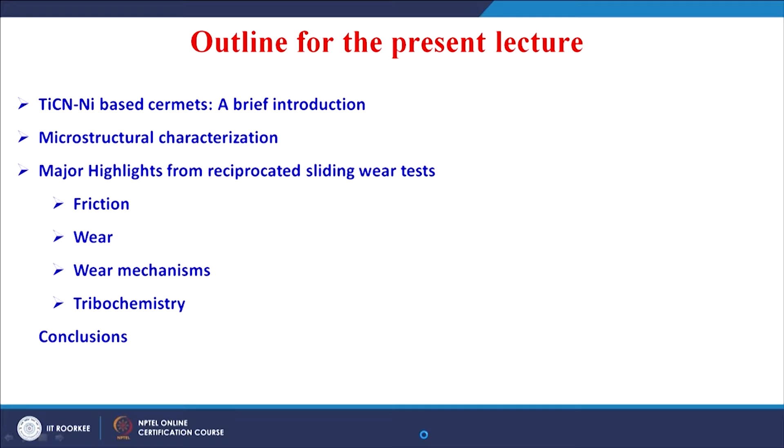Welcome all again. Today we will learn about the salient results of studies done on the tribochemistry of particular cermet materials. The outline of the present lecture: I will introduce titanium carbonitride based cermets and give a brief introduction on their microstructural characterization, then I will focus majority of this lecture on explaining the friction results, wear results, the dominant wear mechanisms, and the tribochemistry involved in the wear.

Let us start understanding what is this cermet. Cermet is a ceramic with a metallic binder, so it is called a cermet. Several examples of cermets are used in engineering applications, like tungsten carbide cobalt cermet, aluminum oxide nickel cermet, zirconium oxide nickel, titanium carbide with nickel or cobalt, or titanium carbonitride with nickel. These are several examples of cermet materials used in engineering applications.

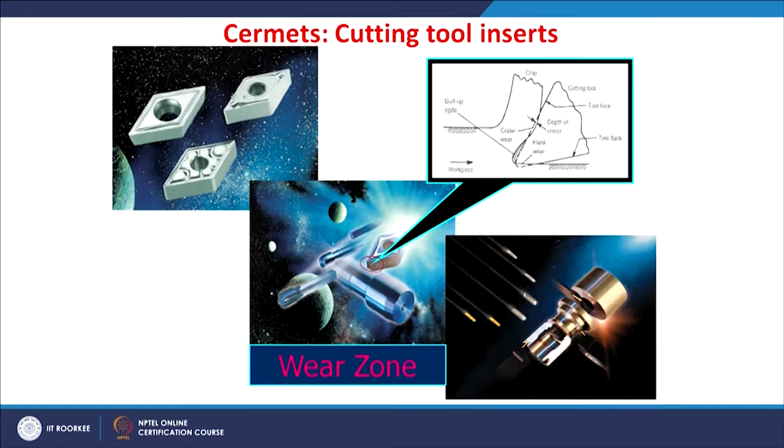Regarding engineering applications, these cermets are mainly used in cutting tool applications as an insert for the cutting tool. In machining, if you look at the tip of the nose of this tool and the workpiece, there is a large amount of friction generated. This friction induces wear, but also induces high temperature. So friction-induced heat and damage occur simultaneously and lead to material degradation. Particularly in cutting applications, the mechanisms should be studied in the crater wear or the flank wear of these cutting tool inserts.

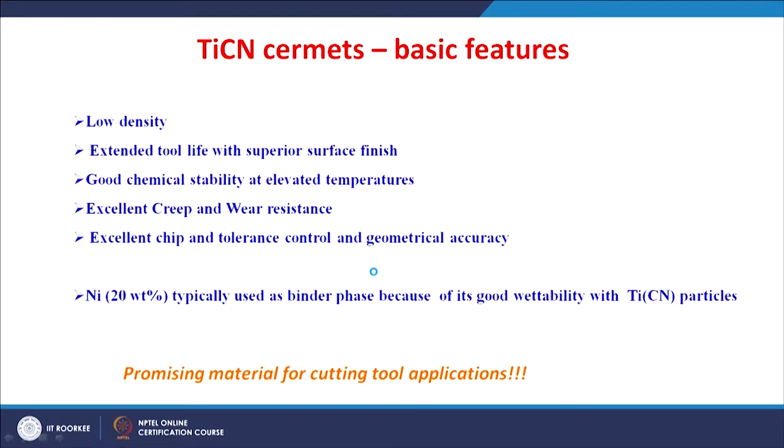Titanium carbonitride based cermets are important because they have lesser density, extended tool life with superior surface finish, good chemical stability at elevated temperature, excellent creep and wear resistance, and excellent chip and tolerance control leading to geometrical accuracy. The market of cutting tools for machining harder materials is generally dominated by tungsten carbide cobalt. Compared to tungsten carbide cobalt cermet, these titanium carbonitride cermets are attractive because of the properties mentioned here.

In these cermet materials, the ceramic of titanium carbonitride is attached with a metal, generally nickel, cobalt, or molybdenum. Nickel is generally used as a binder phase because of its good wettability with the TiCN particles. So the ceramic of TiCN attached with the nickel binder as a cermet - titanium carbonitride with nickel - is a promising material for cutting tool applications.

Apart from this binder phase which gives us toughness, there are certain carbides or nitrides also added to improve performance for cutting tool applications. For example, tantalum carbide, niobium carbide, or hafnium carbide are generally used to improve hot hardness or thermal shock resistance. When these cermets are combined with these carbides, they improve the intermittent cutting performance.

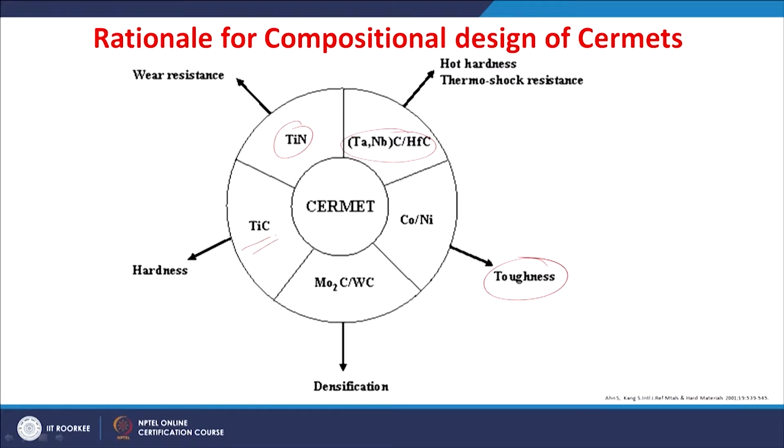Titanium nitride is generally used to improve wear resistance, whereas titanium carbide is used for improving hardness. Densification will be improved if you add tungsten carbide or molybdenum carbide. Tungsten carbide is also known to improve the toughness of this material.

From the compositional design aspect of these materials, it is very important to evaluate and understand the influence of various additions on the wear properties. On this basis, this particular study was done to understand the behavior of these composites - the ceramic with a metal composite, called cermets - in sliding wear conditions.

For these, cermet materials were prepared by a powder metallurgical processing route. Initially, the powders of titanium carbonitride and nickel, and then the respective carbides of tungsten carbide, niobium carbide, tantalum carbide, or hafnium carbide were mixed in a ball mill using tungsten carbide cobalt balls in acetone. These were compacted at 100 MPa, and then these cermet batch compositions, after compaction, were sintered in a conventional way - pressureless sintering at 1510 Celsius for 1 hour under vacuum.

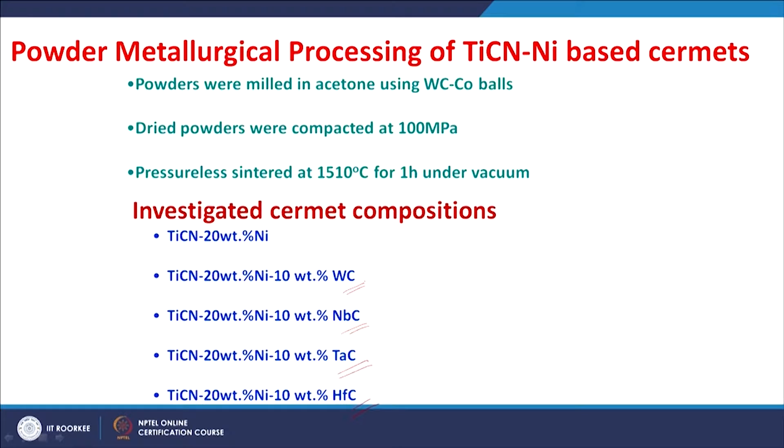So these are the investigated cermet compositions: TiCN with 20% nickel, and TiCN 20% nickel with 10% tungsten carbide, or 10% niobium carbide, or 10% tantalum carbide, or 10% hafnium carbide. So these cermets were studied.

After sintering, the microstructure looks like this. There is a black core region, and then there is a shell, generally called the rim region, and then attaching this binder phase. The black region is the core, the gray color region is the rim, and the brighter region is the binder phase.

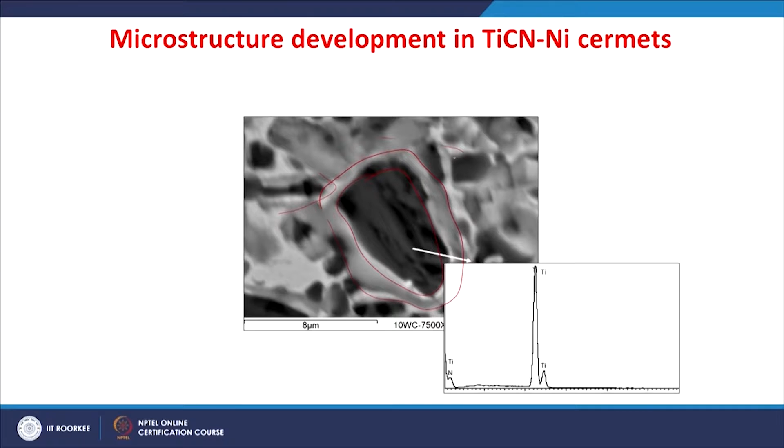EDS analysis of these three different phases indicates the core, which is black, is rich with titanium, whereas the rim region also contains, along with titanium, the tungsten, and whereas the nickel binder phase, which is a bit brighter in contrast, has nickel and titanium.

This core and rim structure is believed to develop by liquid phase sintering. When the liquid forms, since nickel has a lower melting point than this titanium carbonitride, while sintering these cermets, this nickel melt will penetrate among the particles of these ceramics, titanium carbonitride and the respective carbides.

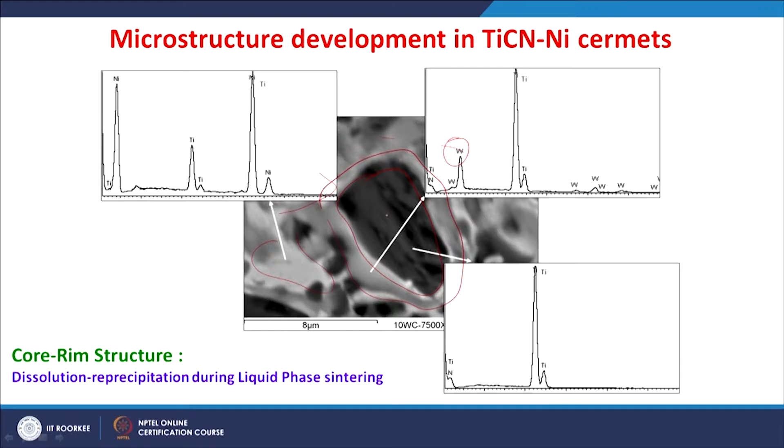The liquid wets the solid particles and there is dissolution of the solid, and in the process of sintering there is precipitation. So, the undissolved portion is a core, whereas the precipitated portion is a rim.

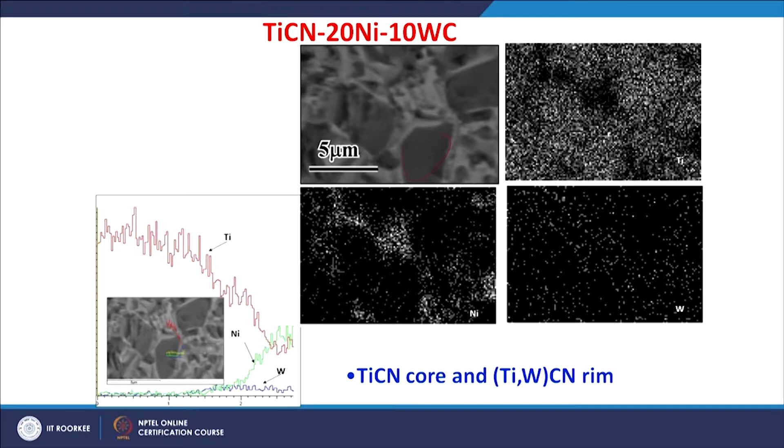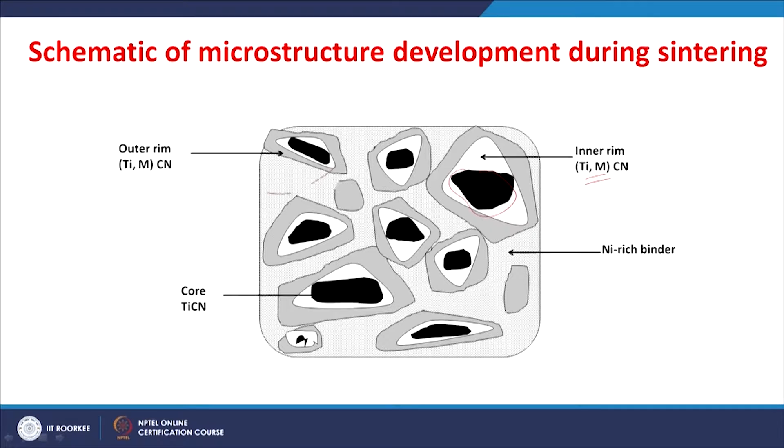There is a core region and a rim region, and the rim region is further divided into an outer rim and an inner rim. Generally, the inner rim is rich with heavy metal from the added secondary carbides, and then there is the binder region, which is nickel rich.

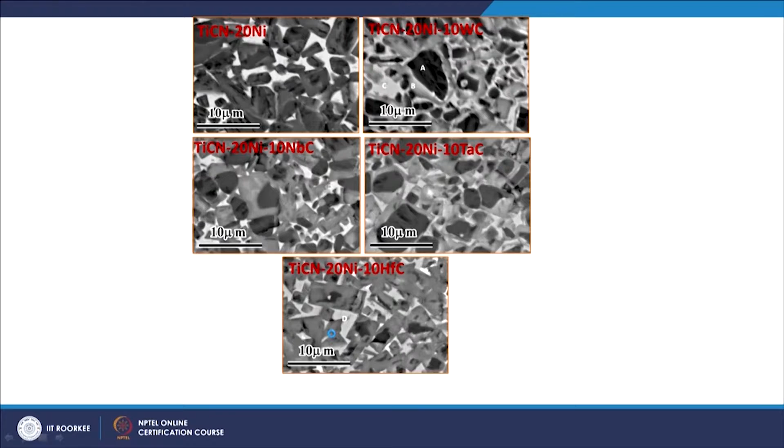This is a collection of typical microstructures of the investigated cermets. You can see similar features present in the sintered materials, but there is a difference in the frequency of the core or rim phases, as well as their size. A systematic investigation using the line intercept method shows a larger core region.

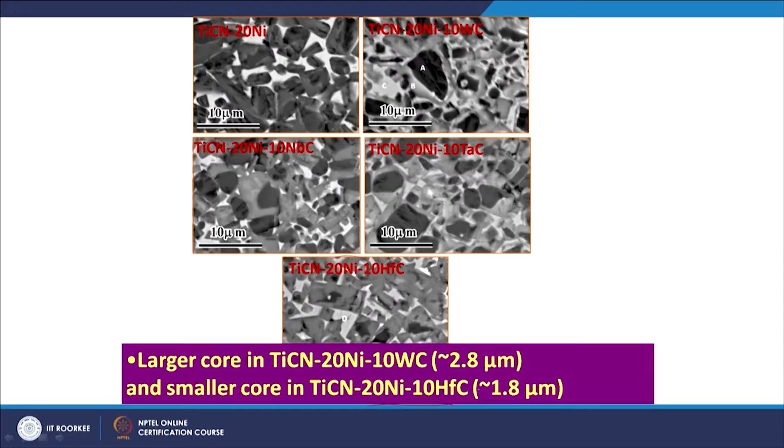The average core region is around 2.8 micrometers in the titanium carbonitride nickel tungsten carbide cermet, whereas a smaller core region is seen in the titanium carbonitride nickel hafnium carbide cermet. So there is an average size difference in the cores obtained after sintering.

This actually reflects on the mechanical properties as well. The hardness ranges from around 9 to 12 gigapascals with changes in composition.

The baseline cermet, without any carbide, and those with hafnium carbide or niobium carbide, have a hardness range between 9 and 10 gigapascals, whereas higher hardness is obtained for cermets containing tungsten carbide and tantalum carbide. Of these, the cermet with tantalum carbide shows the maximum hardness, followed by the one containing tungsten carbide.

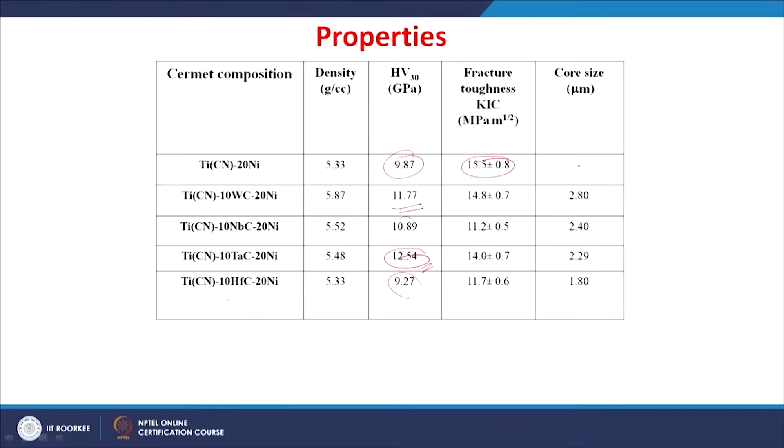The fracture toughness ranges from 11 to 15 MPa root meter. The maximum fracture toughness is obtained for titanium carbonitride with nickel without any secondary carbides. By adding secondary carbides, the fracture toughness tends to reduce, and among the cermets with secondary carbides, those with tungsten carbide and tantalum carbide additions show the maximum fracture toughness.

With this information, we conducted some sliding wear tests for the cermets under reciprocated sliding conditions.

As explained earlier, reciprocated sliding gives longer contact time, so the material is subjected to more wear, and the debris remains in longer contact, causing a difference in subsequent wear.

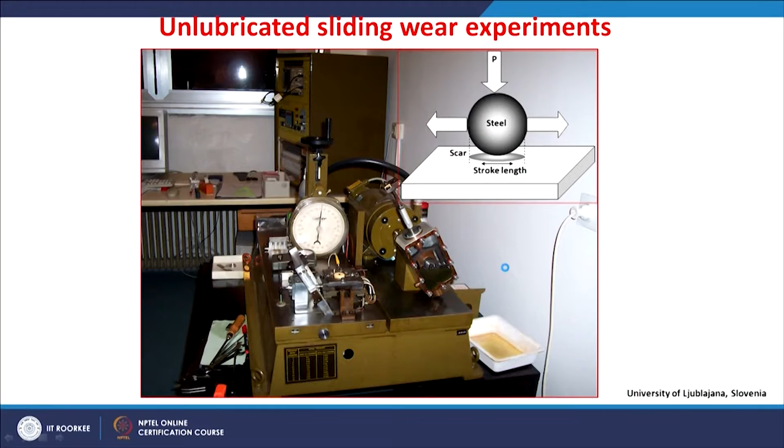For these experiments, we selected a sliding wear tester that reciprocates over a short distance. These experiments were done at the University of Ljubljana, Slovenia.

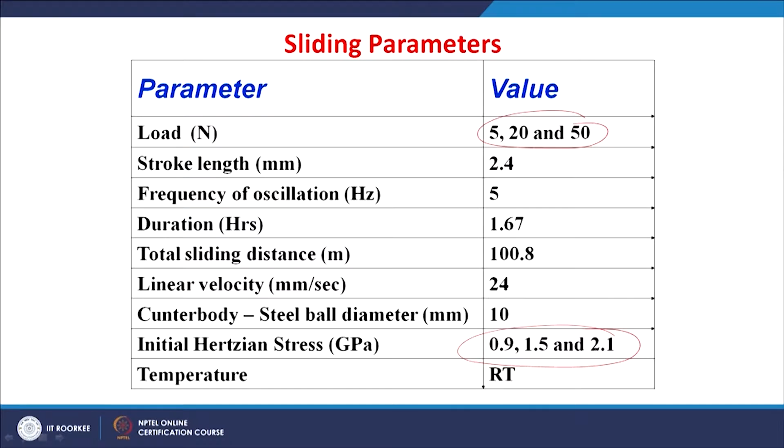The experiments were done for the investigated cermets with changing load of 5, 20 and 50 Newtons, giving an initial Hertzian stress maximum of 0.9, 1.5 and 2.1 gigapascals respectively, with all other parameters kept constant.

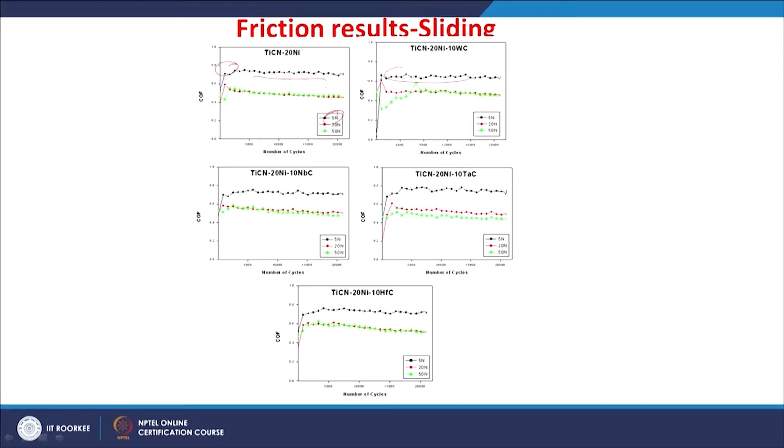These were tabulated: the average steady state coefficient of friction for the investigated cermets under different loading conditions. Higher coefficients of friction are obtained at lower loads, whereas this decreases at higher loads of 20 or 50. The average steady state coefficient of friction is between 0.64 to 0.75 at 5 Newton for the investigated cermets, whereas at higher loads of 20 or 50 Newton it varies from around 0.46 to a maximum of 0.52, but there is no much difference between the friction obtained at 20 or 50 Newton.

Among the investigated cermets, even at a lower load of 5 Newton, the minimum coefficient of friction was obtained for the cermet having tungsten carbide, whereas the maximum coefficient of friction is obtained for the cermet having hafnium carbide, or for the baseline cermet. There is almost no difference here, but overall, at lower load the coefficient of friction is high, whereas at higher load it becomes less. This indicates two load regime conditions: a higher load regime at 20 or 50 Newton, and a lower load regime at 5 Newton, where the friction changes.

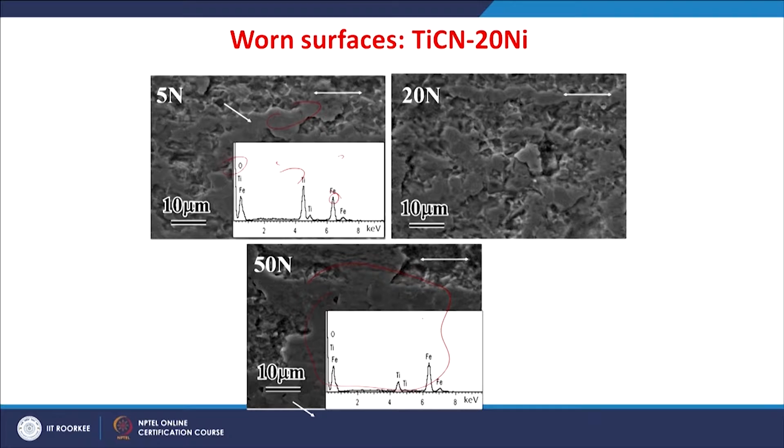The EDS analysis of this layer fragment shows oxides of titanium and iron. At higher loads, you again see oxides of titanium and iron, but an interesting observation is that the titanium peak is reduced while the iron peak is increased. So with increase in load, the iron oxide content is more than the titanium oxide in the layer. There is a deformation and onset of tribolayer formation at lower load, whereas dense tribolayer formation is observed at higher loads.

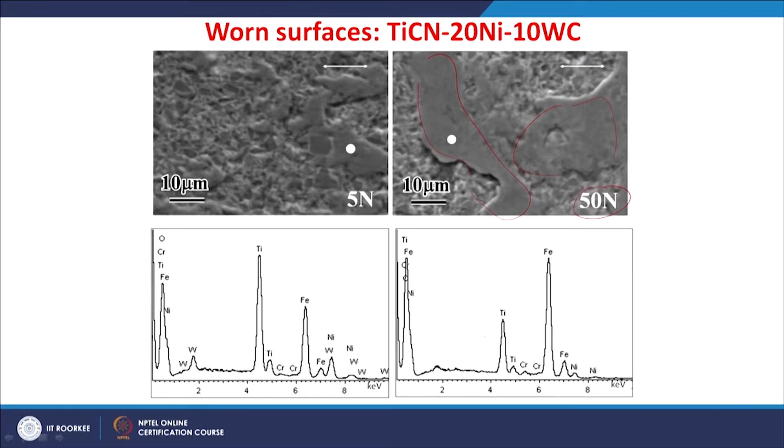The worn surfaces of the titanium carbonitride nickel tungsten carbide cermet again show minimal presence of this layer at lower load, whereas at higher load the majority of the surface is covered by this layer. The EDS analysis shows a similar observation that they become richer with iron oxide.

At the higher load conditions, the increase in friction-induced temperature, because of the higher loads, and the compaction of debris, results in the formation of such a layer, and this layer actually protects the underneath surface, reducing the wear or the friction.

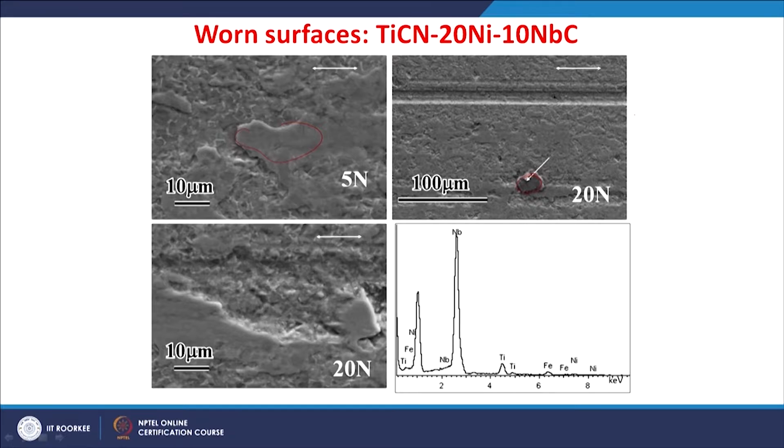These are the worn surfaces for the titanium carbonitride nickel niobium carbide cermet. You can again see pull out of material and signatures of the tribolayer, along with entrapment of debris and abraded grooves. More or less similar features are observed, but in all these conditions the nickel presence is very minimal on the tribolayer. These are the worn surfaces obtained for the cermet after sliding at 5 and 20 Newton.

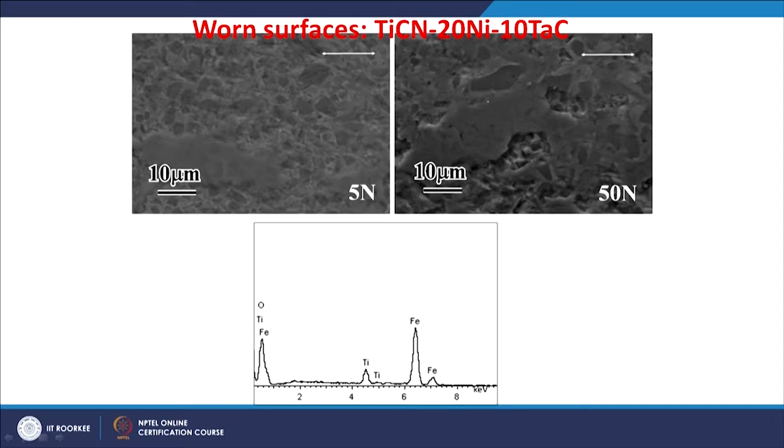The cermet was titanium carbonitride nickel and tantalum carbide. Again it shows coverage by the tribolayer at higher loads. The hafnium carbide containing cermet shows very severe pullouts and cracked material, whereas at higher loads there is a layer formation.

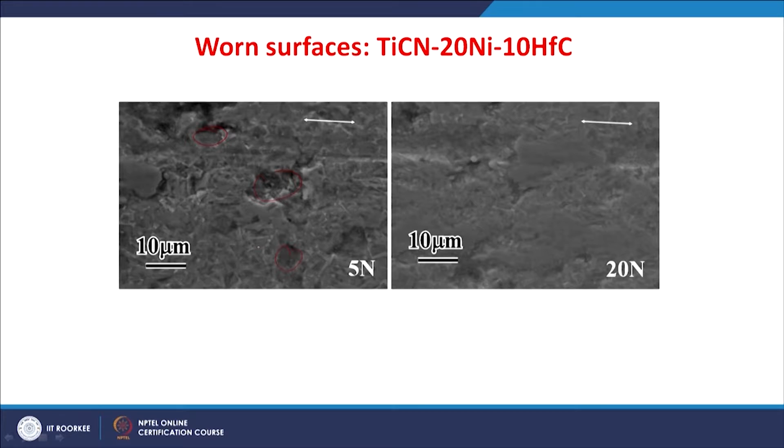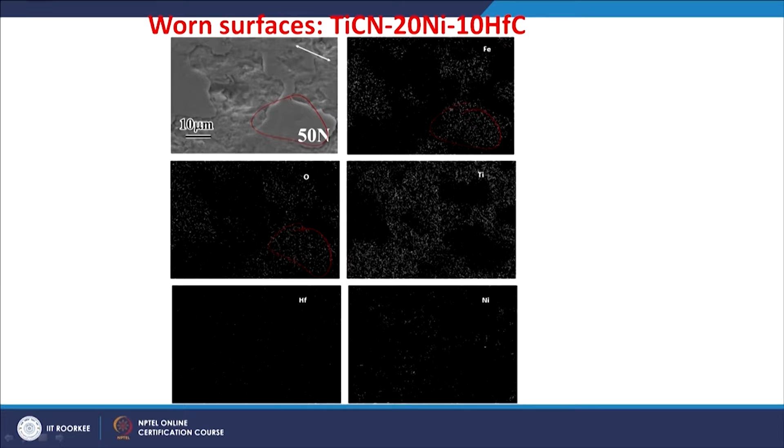The X-ray mapping of these cermet materials after sliding at higher load also indicates this layer is rich with iron and oxygen, whereas these layered areas do not have any nickel, hafnium, or titanium.

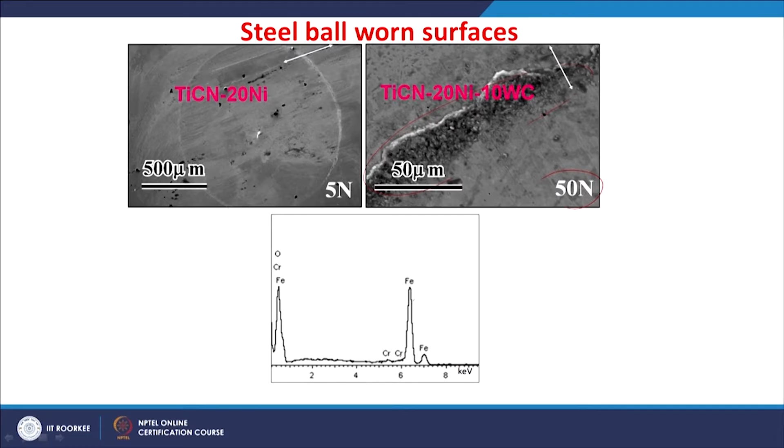The counterbody surfaces also show this tribolayer formation at higher loads. Again, these are signatures of layer formation, and the counterbody surfaces are also rich with iron oxides, whereas the wear results for the counterbody steel ball show almost similar features.

With increase in load there is a decrease in wear, but a very important observation is that the cermet having the highest hardness, which showed the lowest wear at lower load, showed the highest wear for the counterbody. So the baseline cermets actually showed lesser wear than this one.

Let us understand this in more detail by analyzing the debris. These debris were collected for a different cermet having a larger amount of tungsten carbide and subjected to the same conditions of sliding at 50 Newton. These debris were collected carefully after sliding, and then subjected to EDS and X-ray diffraction analysis.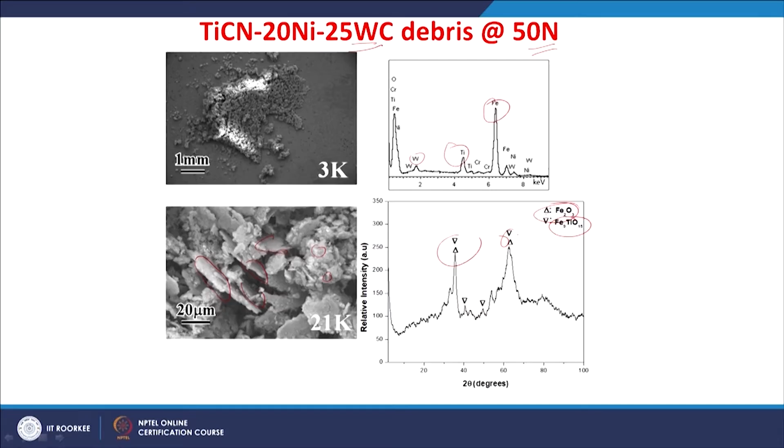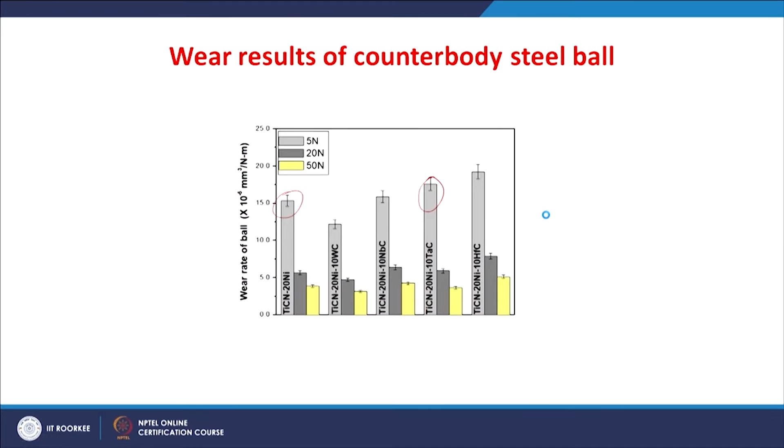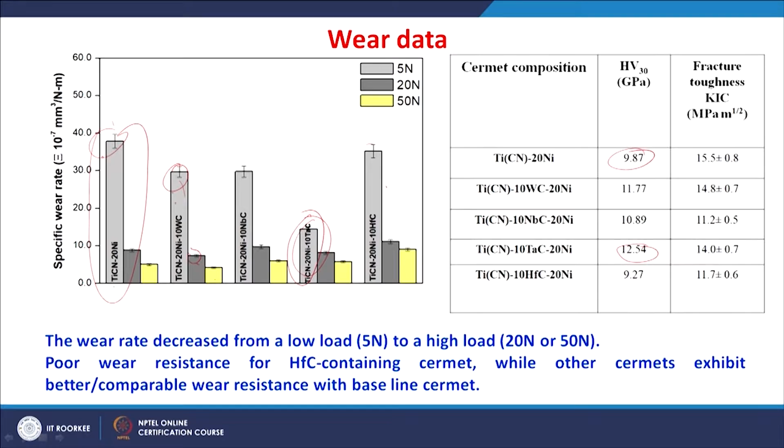All these results can be understood by the tribochemical reactions. The very important observation so far is that at lower loads the friction is high and at higher loads it is less, and similarly at lower loads the wear is high and at higher loads the wear is less.

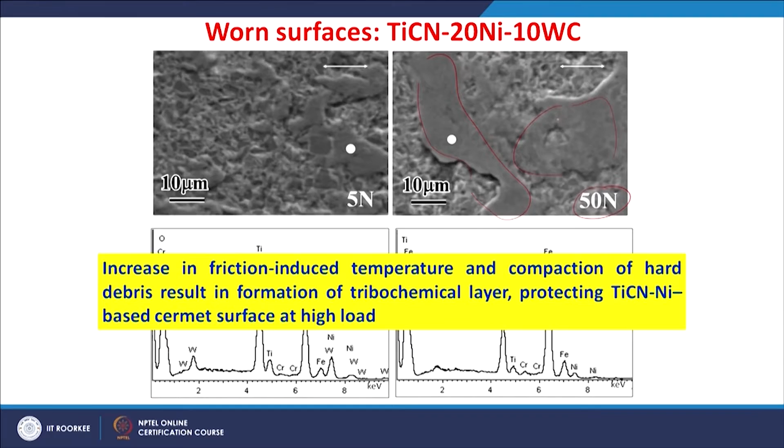At higher load there is domination of the tribolayer, whereas at lower loads it is more or less removal of material by mechanical fracture. So it is now understood that at lower loads it is only the mechanical aspect contributing to the wear, whereas at higher loads it is the tribochemical layer.

Generally what happens is, in the initial stages of sliding, due to the difference in hardness between the steel ball and the cermet, with the cermet having higher hardness than the steel ball, the steel ball wears out easily, and then elements from the ball, iron and chromium, get oxidized because all these tests were done in ambient conditions. So there is a chance that iron oxide or chromium oxide will form.

As sliding continues, these hard debris of iron oxide or chromium oxide will abrade the cermet material as well. We saw some signatures of this abrasion and the entrapment of debris. This abrasion leads to removal of material from the cermet surface, and from the cermet surface this material removal results in the oxidation of these elements from that material.

So we will have oxidation of these elements—for example, titanium gets oxidized, tungsten is oxidized, niobium is oxidized, tantalum is oxidized, hafnium oxidizes, nickel oxidizes. This oxidation of the cermet elements is possible in the continuous sliding process. Initially iron oxide is formed, and then this hard iron oxide will abrade the cermet surface, and elements from the cermet surface also get oxidized, forming oxides on the surface.

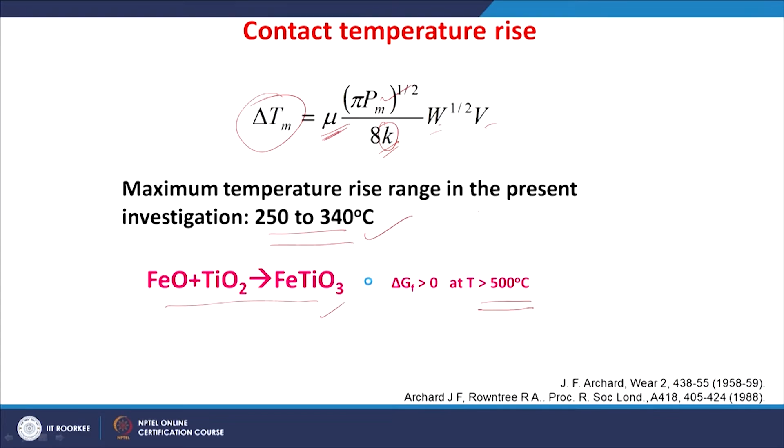It is now very clear that the formation of these oxides on the surface will lead to the mixture of iron oxide and titanium oxide and then lead to iron titanate. This iron titanate is thick and viscous in nature, and it actually facilitates the sliding. So the friction is reduced because of the coverage of this layer, and the material removal is also reduced. All these conditions indicate the formation of the layer and the removal of the layer at higher load, meaning the tribochemical layer formation and removal dictates the wear behavior.

Our results show that the iron titanium oxide rich layer formation is beneficial in reducing the wear and friction for this material.

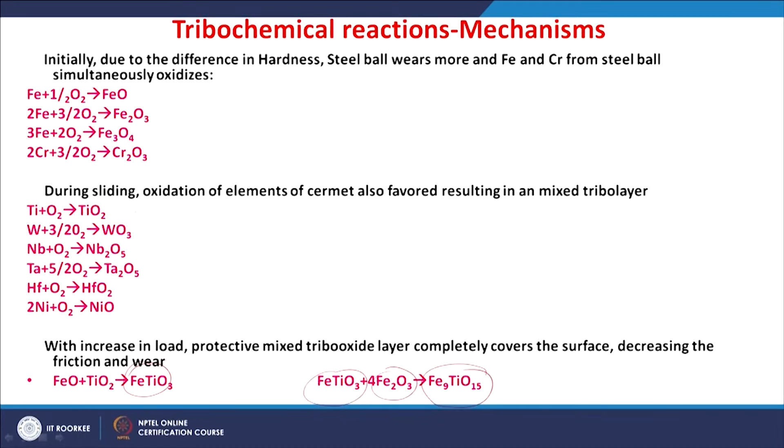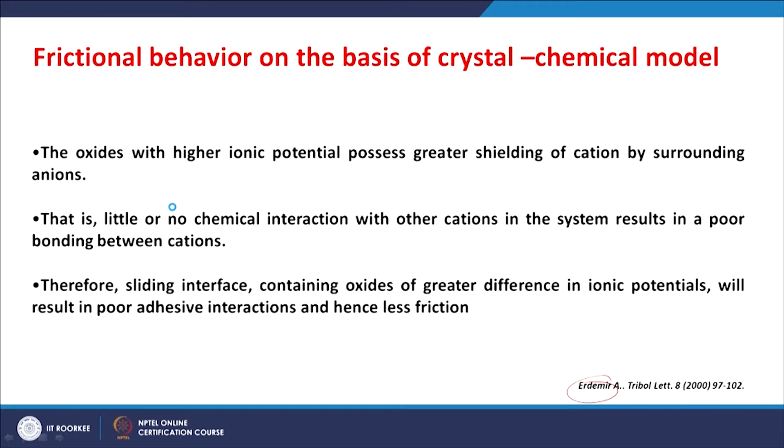The friction behavior can also be understood by a crystal chemical model proposed by Erdemir. As we have seen, there is a chance that several oxides are formed on the surface at the contact. Oxides with higher ionic potentials possess greater shielding of the cation by surrounding anions, so the cation has little or no chemical interaction with other cations in the system. The sliding interface which is rich with oxides of a very large difference in ionic potentials will result in very poor adhesive interactions, which contributes to lesser friction.

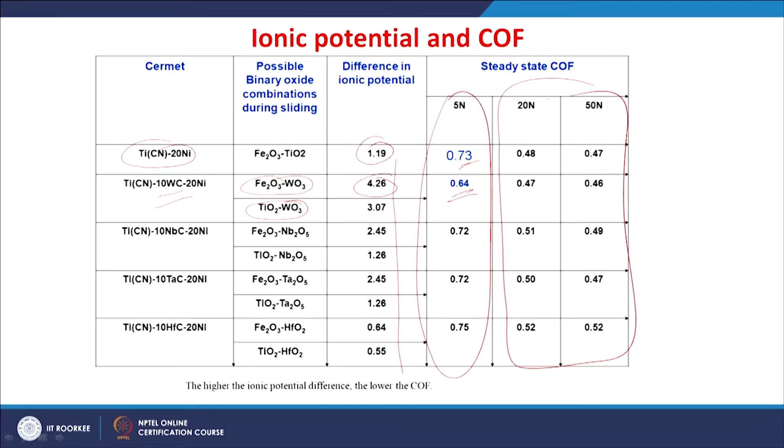That indicates whenever the wear is dominated by mechanical aspects, the abrasion, pull out and fracture, then you have the effect of these oxides and the respective difference in ionic potentials on the friction behavior. Whereas at higher load, the surface is completely covered with a tribo layer rich in oxides, particularly iron titanium oxide.

So it happens like this: the surface is filled with the oxide, so the friction or sliding is actually going on between the layers of these oxides. The actual contact between the steel ball and the cermet surface is lost, it is only between the layers of these oxides. So you do not have any influence of the difference in ionic potential at higher loads, where there is domination of the tribochemical layer formation. So the crystal chemical model applies only at lower loads where there is mechanical fracture induced wear, whereas at higher loads this does not happen.

So overall, as a summary of these sliding wear mechanisms: at lower loads there is a lot of abrasion and debris, which leads to oxidation of this debris and the onset of tribo layers. But this layer becomes dense, covering the entire worn surface, and is rich with iron titanium oxides. So the layer cracks and is removed. Mainly the wear at higher loads occurs by removal of this layer rich with iron titanium oxide, whereas at lower loads the wear is more dominantly by abrasion, cracking, or pull out of material.

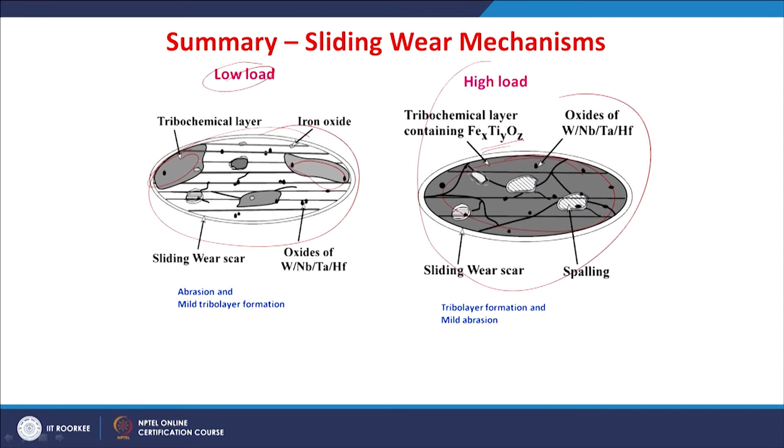So the process is like this: in initial conditions of sliding, the deformable nickel binder phase comes out, smears out and deforms, followed by cracking of the ceramic core and rim phases. So at lower loads the abrasion is dominant, at higher loads the oxidation of this debris leads to a compacted layer rich with iron titanium oxide, because it fills entirely on the surface and reduces further wear from the underneath surface.

So the overall conclusions from the present study: at lower loads the friction and wear are influenced by the microstructural constituents of these titanium carbonitride nickel based cermets. At lower load, that is 5 Newton, the formation of abrasive oxides of these transition metals is dominant, resulting in higher friction. Also, the chemical characteristics of various possible oxide combinations dominate the friction at lower loads.

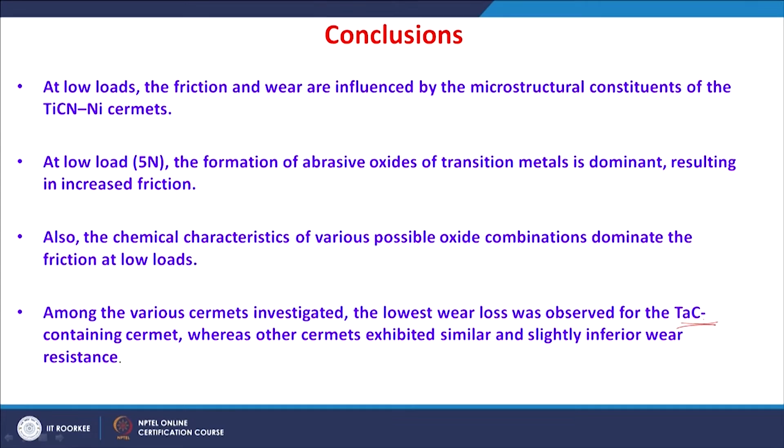Among the cermets investigated here, the lowest wear loss was observed for the cermet containing tantalum carbide, whereas other cermets exhibited similar and slightly inferior wear resistance. Regarding the mechanism, at lower load the abrasion and mild tribo layer are predominant, however the formation of a dense tribochemical layer rich in oxides of iron and titanium is responsible for the reduction in friction and wear at higher loads.

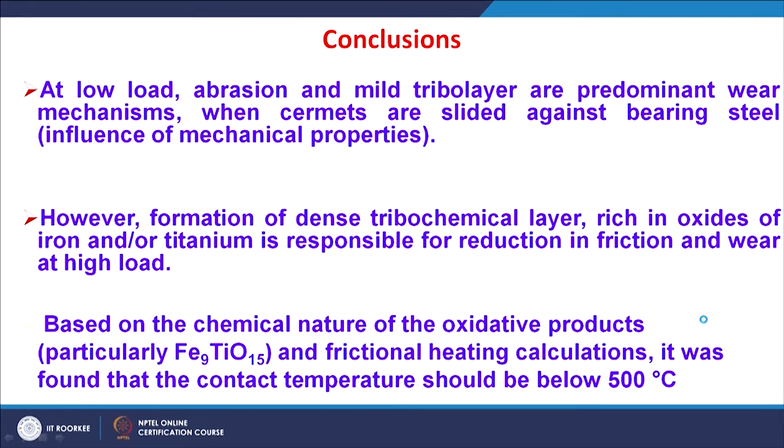Based on the chemical nature of these oxidative products and frictional heating calculations, it was found that the contact temperature should be below 500 Celsius. So one important observation from this study is that the friction and wear properties do not exhibit any direct correlation with the mechanical properties. Remember, hardness has an influence only at lower load conditions; at higher loads there is no such relation.

So when the tribochemical layer is formed, you do not have such a relation with the properties, because the contact surface is actually covered by this tribochemical layer. That means when tribochemical layer formation is dominant, there is no relation at the interface of the investigated tribocontacts. So this study highlights the evolution of the tribochemical layer in relation to contact temperatures. For the given Cermet composition and sliding wear conditions, the tribochemical layer evolves.

So this is a very important study from the application point of view. You have to identify the Cermet composition and the suitable sliding wear conditions, so that these Cermets can be preferred for tribological applications, for example cutting tools.